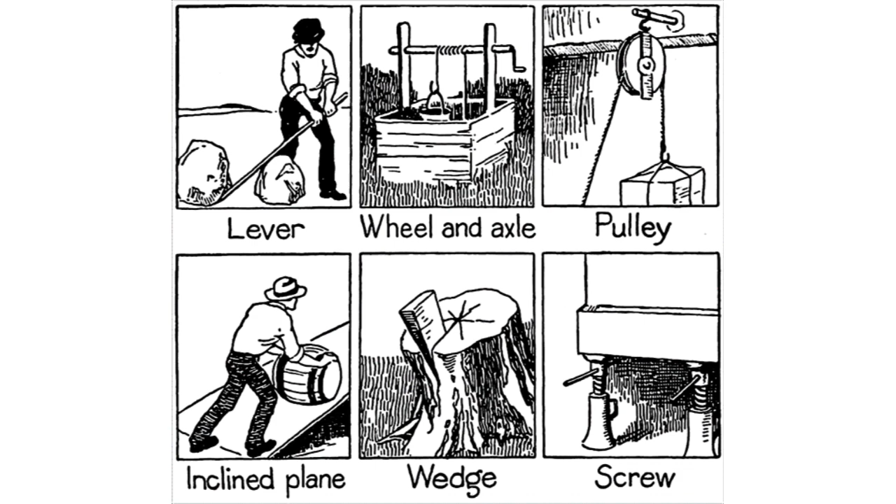5 fundamental devices have been regarded as the Mighty Five, and they are called simple machines: the lever, the inclined plane, the wheel and axle, the pulley, and finally the screw. These are the most basic but, attention, the most important elements of mechanisms used in engineering. Why? Think of a bicycle, for example.

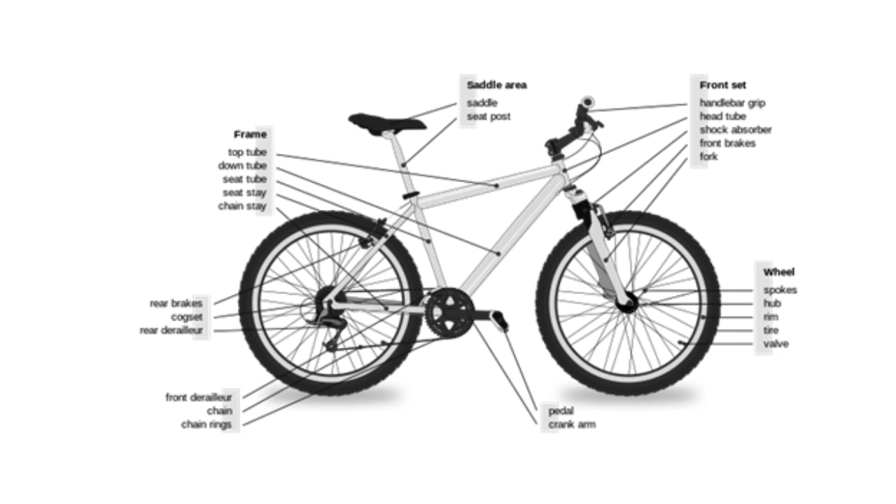A bicycle is a compound machine made up of several simple machines: levers, brakes, gear shifters and handlebars; pulleys, chain on the gears, parts of the shifting and braking mechanisms and the drive train; inclined plane, wedges and screws, teeth on the chain rings, screws that hold the bike together. The tire repair kit uses wedge and lever, and finally, the wheel and axle: the wheels, pedals and crankset.

A compound machine is a machine consisting of 2 or more simple machines. Some examples of compound machines are clippers, a manual pencil sharpener, a crane, a bulldozer, etc. Therefore, it has been said that each one of the Mighty Five can be combined to achieve an almost infinite variety of mechanisms to address endless applications and design all kinds of modern machinery.

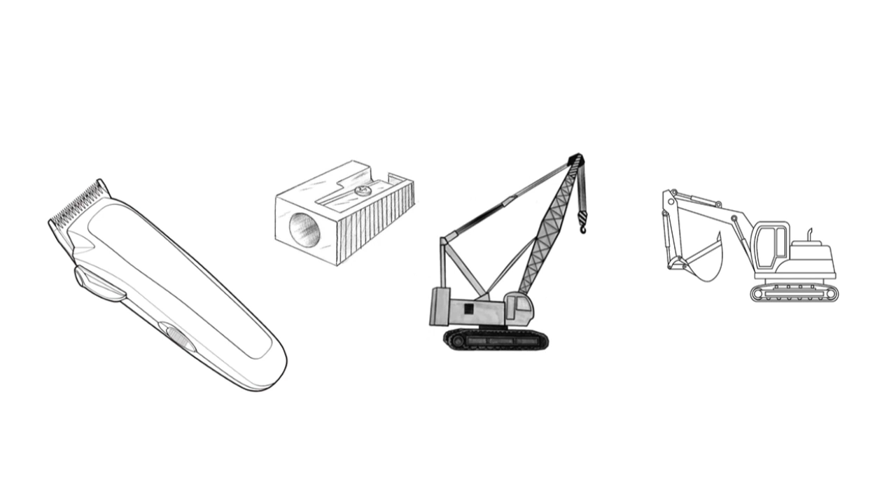In this lecture, our aim is to examine the operating principles behind the 5 simple machines with respect to their basic attributes, such as velocity ratio, mechanical advantage, and efficiency. Velocity ratios of simple machines. Problems dealing with machines usually involve the calculation of their velocity ratio. The velocity ratio, VR, of a particular machine is independent of load and friction and depends only on the dimensions and arrangement of the moving components. Let us calculate it for various simple machines.

The lever. The lever is the simplest machine. It consists of a rigid bar pivoted at a point called the fulcrum, with a load applied at one point on the bar, and an effort at another point sufficient to move or balance the load. A lever which is bent is called a bell crank lever. It is used to provide a change in the direction of the applied forces.

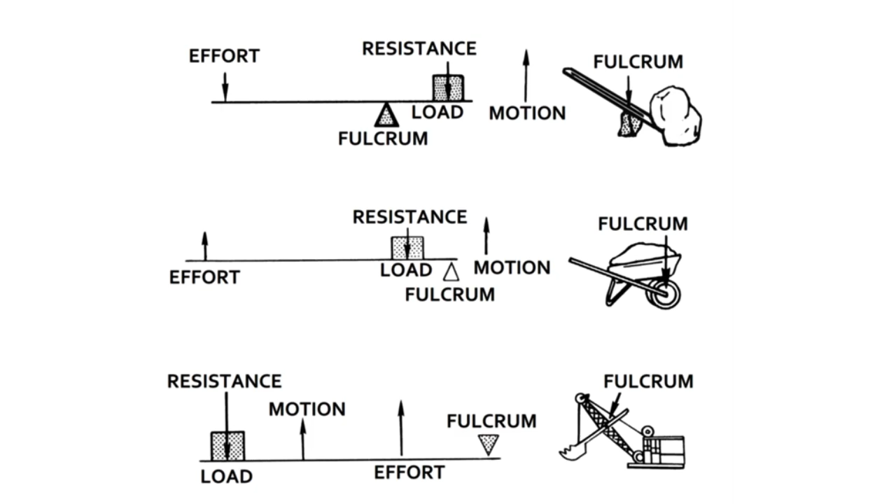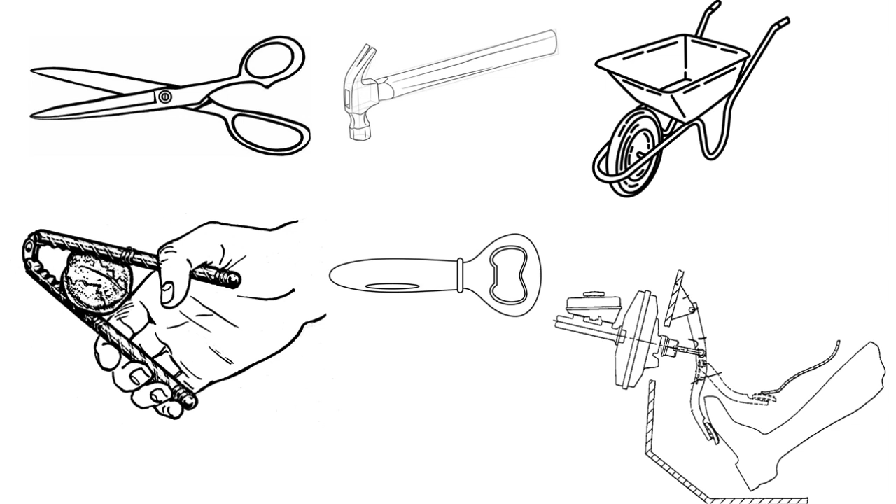The lever has been used since early times for moving or lifting heavy stones and other objects, and it is the fundamental principle of multiple systems and devices. For instance, a pair of scissors, a claw hammer to pull nails from wood. A wheelbarrow is also designed based on the principles of the lever, a nutcracker, a bottle opener, or the brake pedal of a car. Close to my area of work and expertise, biomechanics and biomechanical engineering.

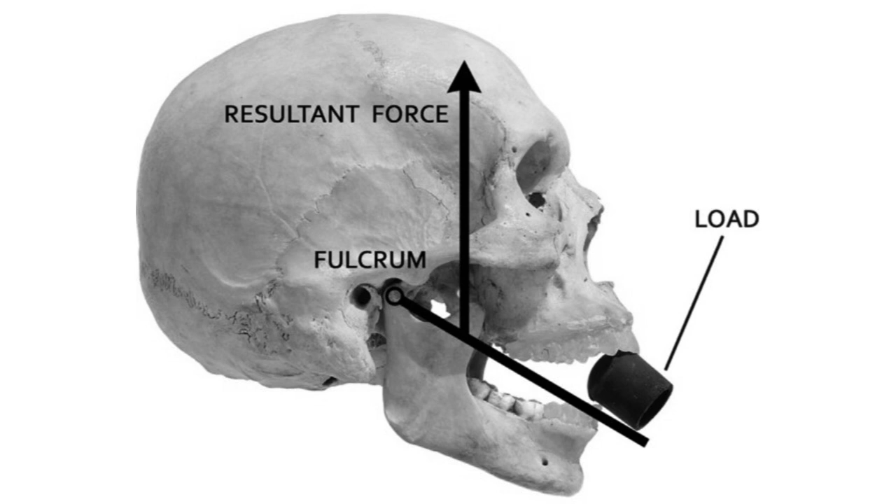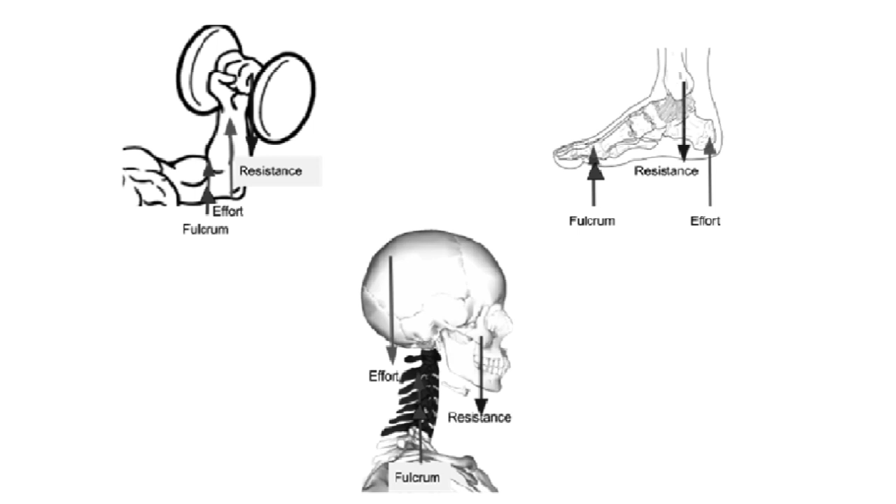The lever is the principle which governs certain elements of our human body, for instance, the mandible of a human skull, and based on its principles is how many elements in our body operate. Are you able to identify the lever mechanism in these elements of our body? The malleus, incus and stapes are small bones in the middle ear, connected as compound levers, that transfer sound waves from the eardrum to the oval window of the cochlea.

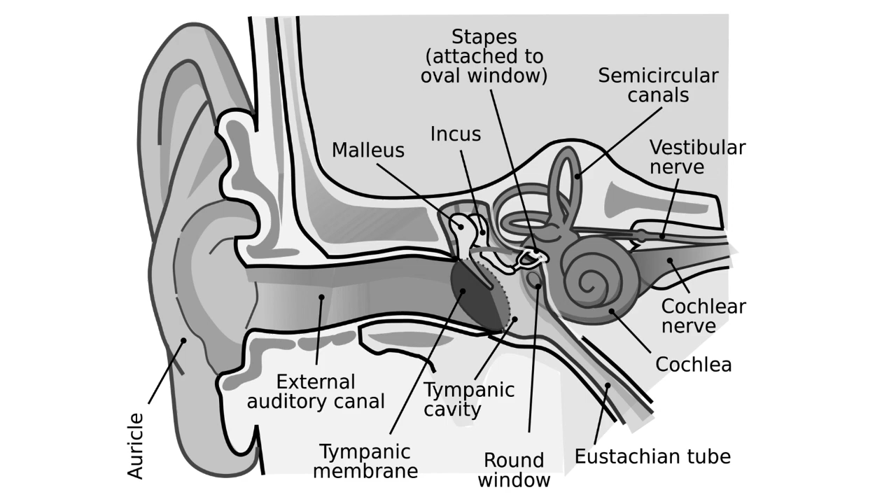Many modern machineries also consist of a combination of straight and bent lever arrangements connected together. The velocity ratio of a single lever arrangement is equal to the ratio of the perpendicular distances from the fulcrum to the line of action of the effort, dE, and the load, dL.

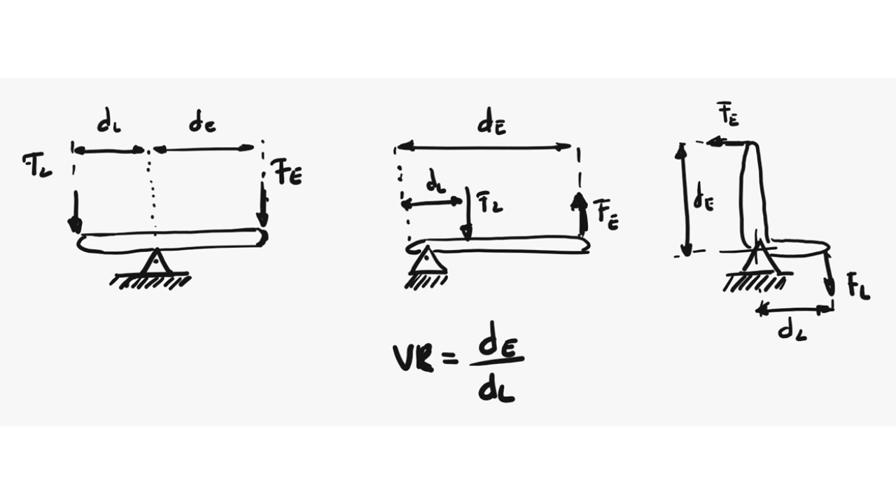The inclined plane, also known as a ramp, as a simple machine, is a surface inclined at an angle to the horizontal used to lift a load by an effort acting parallel to the plane. Examples vary from a ramp used to load goods into a truck, to a person walking up a pedestrian ramp, to an automobile or railroad train climbing a grade.

It is said to have been used in Egypt for moving heavy stones in the construction of pyramids. Nowadays, inclined planes are widely used in the form of loading ramps to load and unload goods on trucks, ships and planes.

Roads for vehicles and railroads have inclined planes in the form of slopes, ramps, and causeways to allow vehicles to surmount vertical obstacles such as hills without losing traction on the road surface. Similarly, pedestrian paths and sidewalks have gentle ramps to limit their slope, to ensure that pedestrians can keep traction.

Inclined planes are also used as entertainment for people to slide down in a controlled way, in playground slides, water slides, ski slopes, and skateboard parks. Modern machinery often employs the principle of the inclined plane for various sliding surfaces, cams, and metal cutting tools.

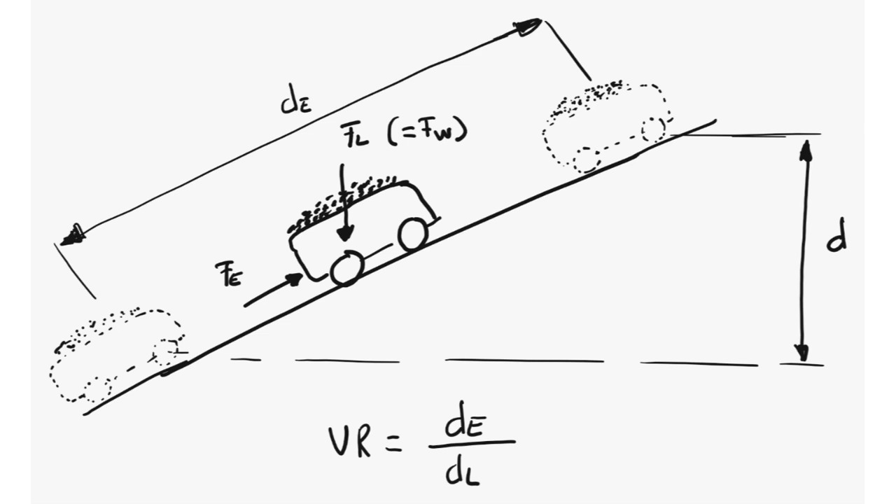The velocity ratio is the ratio of the distance moved by the effort to the distance moved by the load in the same time. When the effort moves along the plane distance dE, the load moves through a vertical distance dL, in the direction in which the weight of the load acts; hence, the equation applies.

Wheel and axle. In this case, the effort is applied at the circumference of the wheel while the load is raised by a rope wound around the axle whose diameter is smaller than that of the wheel. The wheel and axle can be viewed as a version of the lever, with a drive force applied tangentially to the perimeter of the wheel, and a load force applied to the axle supported in a bearing, which serves as a fulcrum.

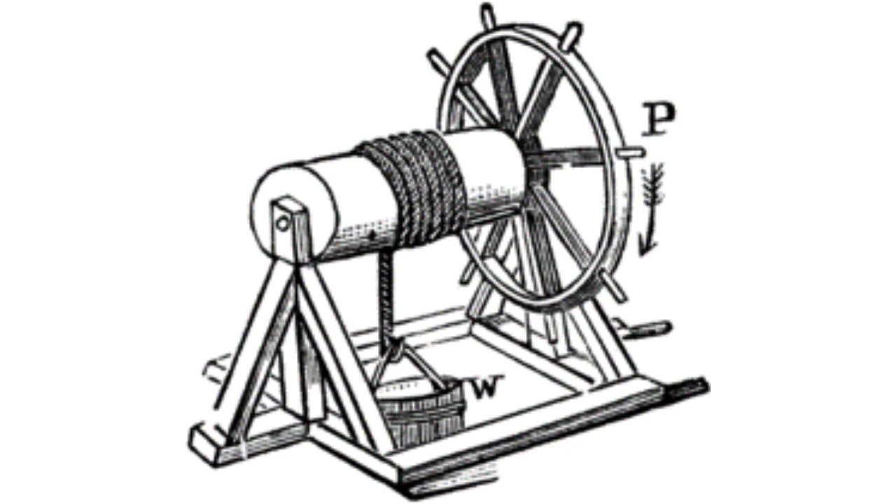The velocity ratio is equal to the ratio of the radius of the wheel to the radius of the axle. It is usually more convenient to express this ratio as the ratio of the two diameters, dW and dA. I let you think of modern applications where you find the wheel and axle mechanism. Look around you.

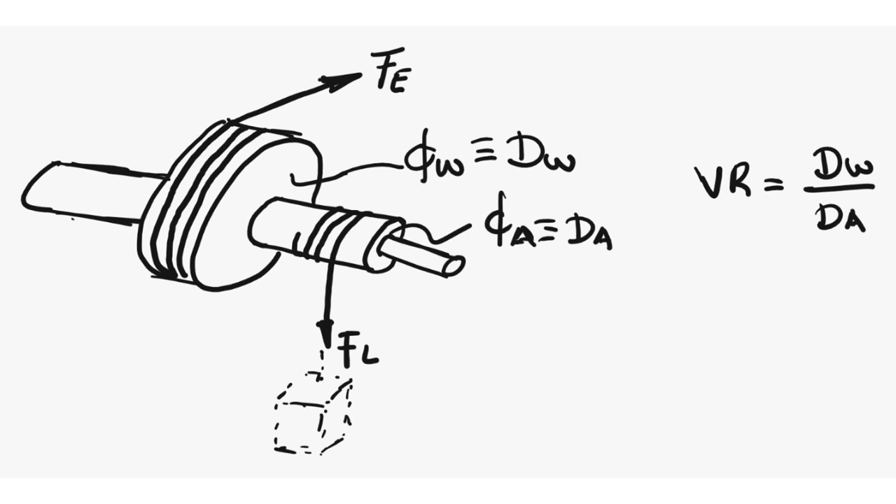Pulley and pulley block. The pulley is one of the most useful of the basic simple machines. It consists essentially of a wheel with a grooved rim carrying a rope or chain and supported in either a fixed or a movable bearing block. A system of fixed and movable pulleys with a continuous rope can provide a useful mechanical advantage, from the geometry of the block and tackle arrangement such as the one shown in the figure.

It can be shown that with pulley blocks using one continuous rope, the velocity ratio is equal to the number of falls of rope supporting the load. Pulleys are also assembled as part of belt and chain drives in order to transmit power from one rotating shaft to another, as we are going to discuss later on.

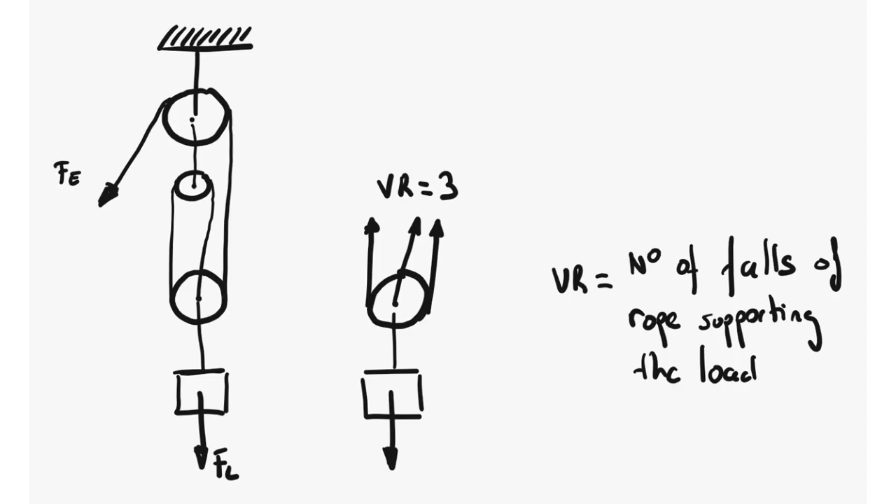It is said there is a famous scene where Archimedes proved the effectiveness of compound pulleys and the block and tackle system by using one to pull a fully laden ship towards him as if it was gliding through water.

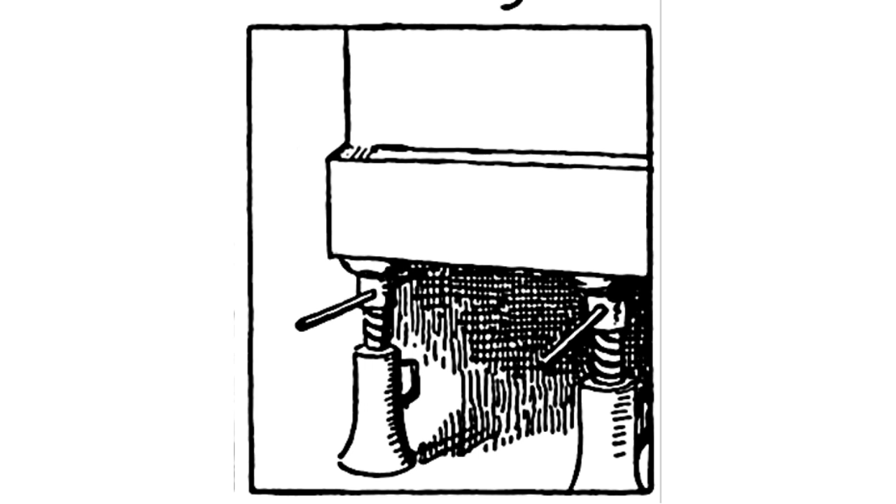Screw jack. A simple screw jack is a portable lifting machine used for raising heavy loads through a short distance. It consists of a screw raised by a nut rotated by the effort applied at the end of a long arm. In some designs, the screw rotates within the nut, which is part of the main body of the jack.

In either case, for each revolution of the arm, the load is raised by an amount equal to the lead of the screw. Thus, when the distance moved by the effort dE is equal to 2πr, where r is the length of the arm, the load moves through a vertical distance dL equal to the lead of the screw.

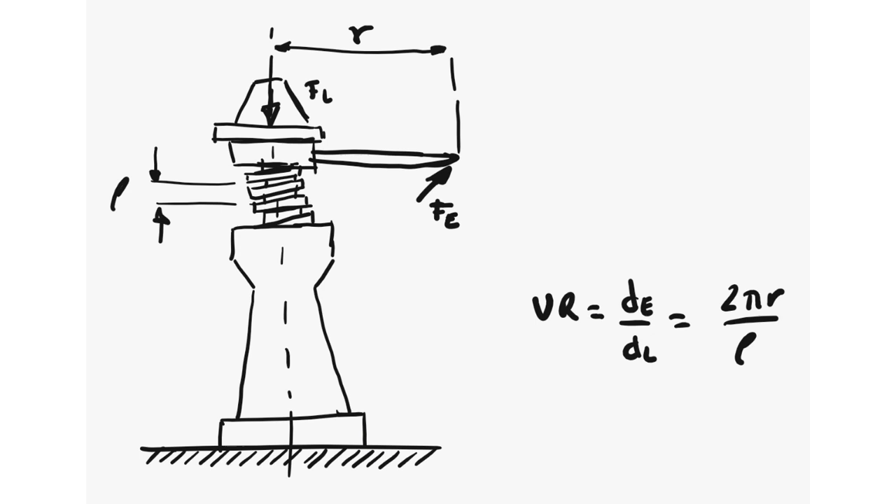The screw was one of the last of the simple machines to be invented. Records indicate that the water screw, or screw pump, was first used in ancient Egypt, some time before the Greek philosopher Archimedes described the Archimedes screw water pump around 234 BC. It was used as a wine and olive oil press in the time of the Roman Empire.

It is used in modern machinery for a variety of purposes, including continuous transmission of motion, as is seen in a screw conveyor, a mechanism that uses a rotating helical screw blade, usually within a tube, to move liquid or materials. They are used in many bulk handling industries.

Screw conveyors in modern industry are often used to move semi-solid materials, including food waste, wood chips, aggregates, cereal grains, animal feed, boiler ash, meat and bone meal, municipal solid waste, and many others.

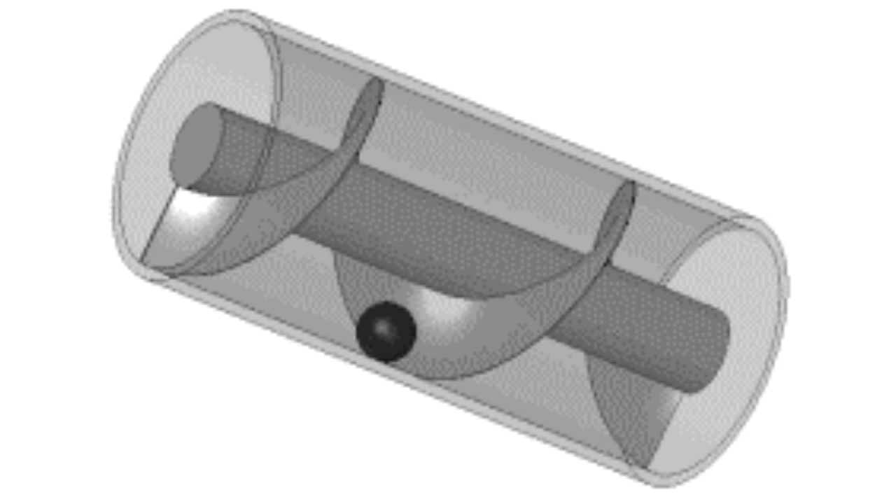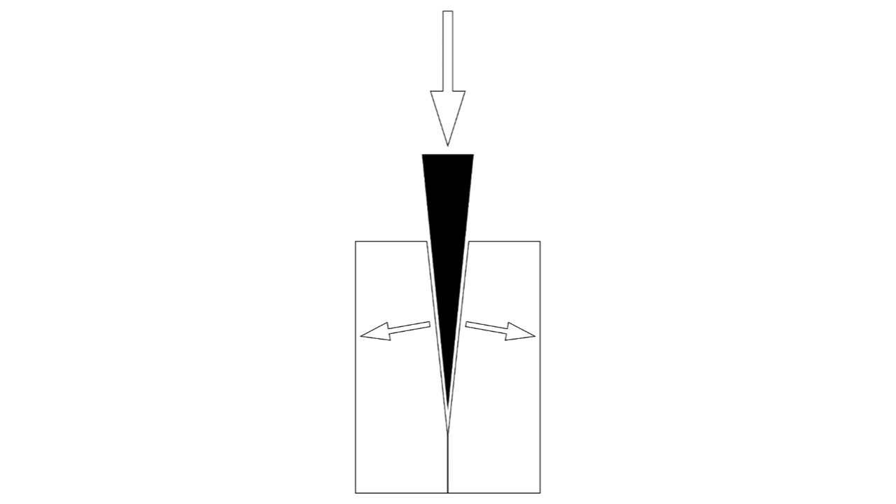In addition to the Mighty Five, there is a sixth simple machine, a wedge, a triangular-shaped tool. It can be used to separate two objects or portions of an object, lift an object, or hold an object in place. Anyway, knowing the velocity ratio of the machine, the mechanical advantage could be obtained as the relation of the efficiency and the velocity ratio for any of the simple machines described. Let's apply these concepts to solve engineering problems.